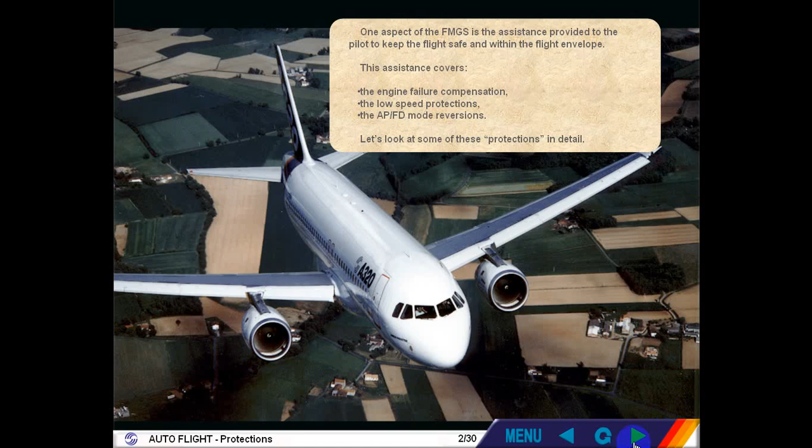In case of an engine failure with autopilot on, the FMGC ensures an automatic yaw compensation in all modes. This is achieved by the FAC, using the yaw damper at takeoff and go around, and the automatic rudder trim in all modes.

Furthermore, the autopilot flight director speed reference system pitch mode automatically adjusts the reference target guidance speed in case of an engine failure at takeoff or go around.

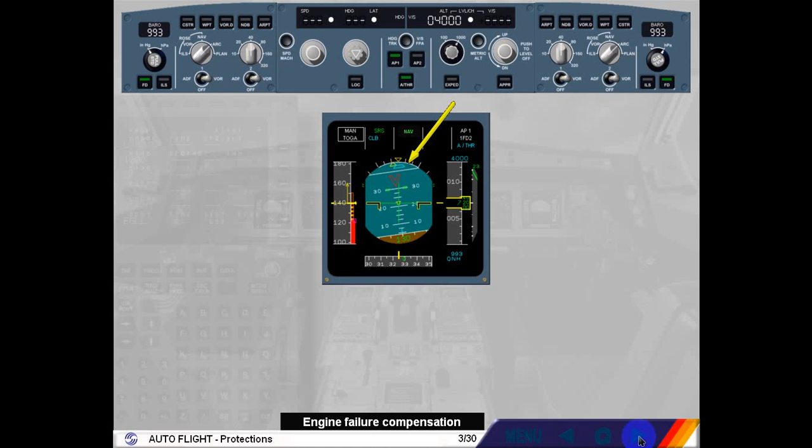Low speed protection is achieved by the following features: the autothrust speed mode, the low energy warning, the alpha floor protection, and the wind shear protection.

When the autothrust is on and in speed mode, if the speed target is selected by the pilot on the FCU and the speed target is below VLS, the autothrust will not allow the speed to decrease below VLS.

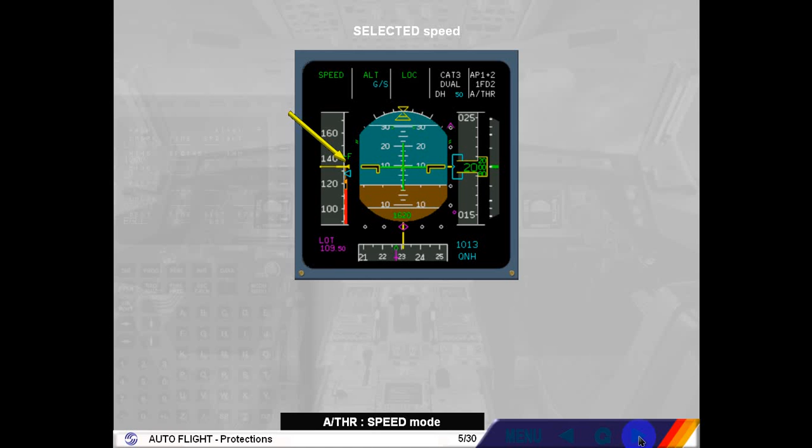If, for any reason such as turbulence, shear, or autothrust off, the aircraft speed drops significantly below VLS, a repetitive speed, speed, speed aural warning is automatically triggered by the FAC.

It drives pilots' eyes to the speed scale, so as to readjust thrust, for example. This warning takes into account the aircraft deceleration rate and current flight path angle, which explains the low energy wording.

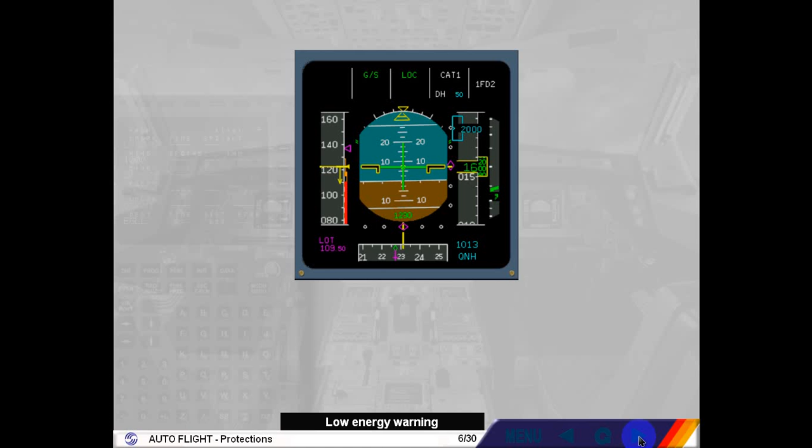It is available when the aircraft is on departure and arrival between 100 feet and 2000 feet radio altimeter and in configuration 2, 3 or full.

If the aircraft speed continues to drop below the low energy warning and the angle of attack increases above a given threshold, the alpha floor function of the autothrust is triggered.

The autothrust commands full thrust, i.e. toga thrust.

The angle of attack threshold, which triggers the alpha floor protection, is processed by the FAC as a function of aircraft parameters such as configuration, weight.

When alpha floor is triggered, autothrust is turned on if it was previously off, indicated by a white autothrust on the FMA. Alpha floor in green is displayed as the autothrust mode.

The alpha floor function is available from liftoff down to 100 feet radio altimeter.

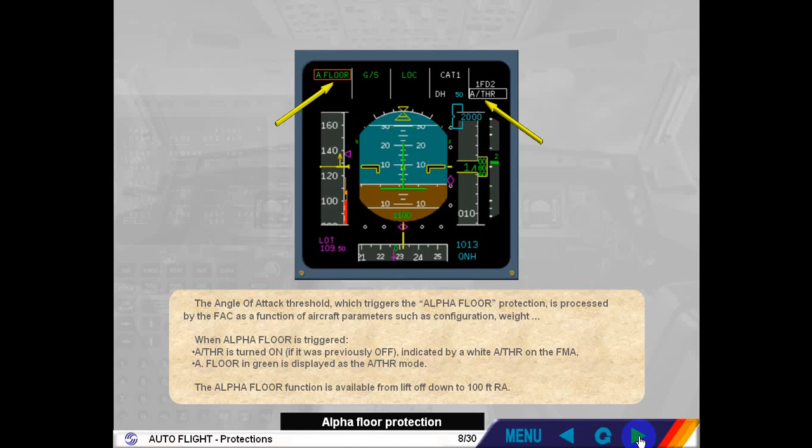Note: the alpha floor protection is lost in cases of combinations of failures such as SFCC1 and FAC2, or both FMGCs. The alpha floor protection is also lost in case of engine out when slats flaps are extended above configuration 1.

When exiting the alpha floor conditions, the autothrust mode reverts to toga lock mode, which indicates that toga thrust is locked regardless of thrust lever position.

To regain thrust control, you have to switch off the auto thrust. You now have manual control of the thrust. You may re-engage the auto thrust when convenient.

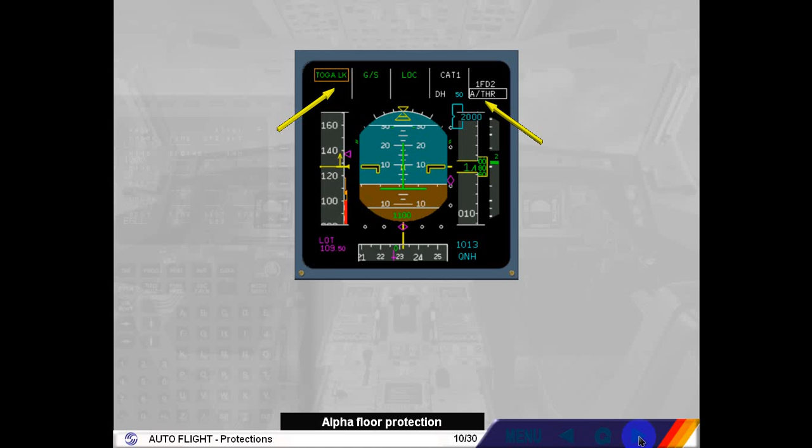Wind shear, wind shear, wind shear. If the aircraft encounters wind shear conditions detected by the FAC, a red wind shear message is triggered on both PFDs, associated with an aural wind shear, wind shear, wind shear warning.

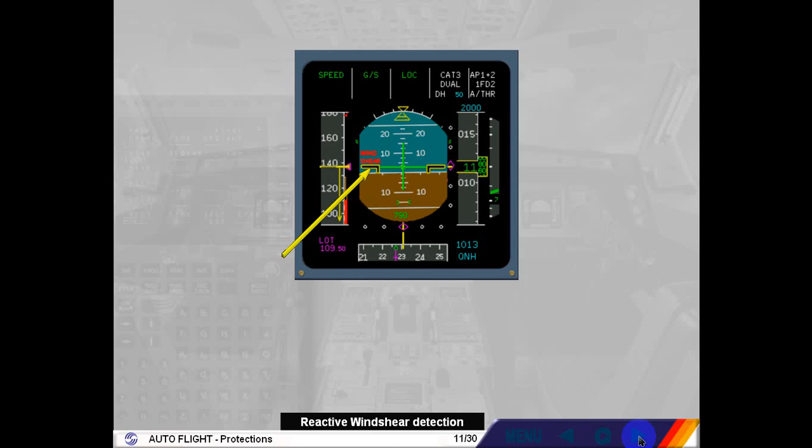This reactive wind shear warning is available from liftoff to 1300 feet at takeoff and from 1300 feet down to 50 feet during landing, with at least Conf 1 selected.

The FMGC provides the following protections against wind shear. At takeoff and go-around, with the autopilot flight director speed reference system vertical mode, which commands a pitch, ensuring a minimum positive rate of climb despite a potential speed drop.

In approach, with the ground speed mini function, the managed speed target in approach is automatically adjusted with wind variations so as to ensure that the aircraft ground speed does not drop below a minimum value.

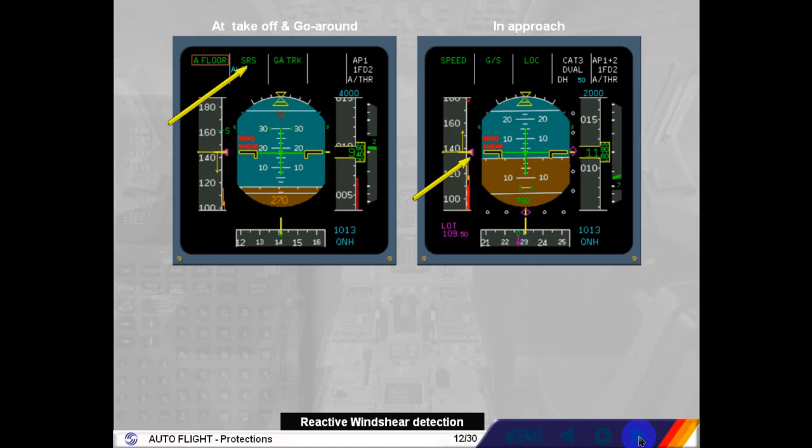Note: if the angle of attack gets too high and reaches the fly-by-wire angle of attack protection, the autopilot disengages. The fly-by-wire maximum angle of attack protection assists the pilot to best react.

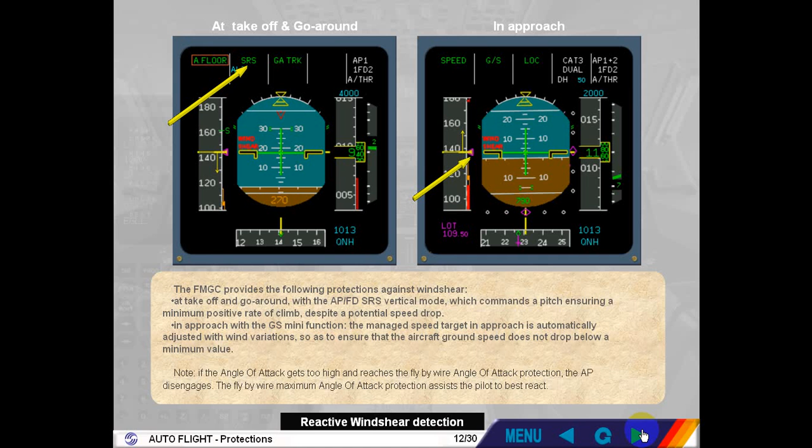Let's now review the mode reversions of autopilot flight director and auto thrust. The mode reversions are automatic mode changes which allow a comprehensive autoflight system behavior when the pilot modifies a target on the FCU, happen in case of loss of navigation mode, and ensure a flight envelope limit speed protection.

Let's review the reversion due to FCU altitude changes. Autopilot is on.

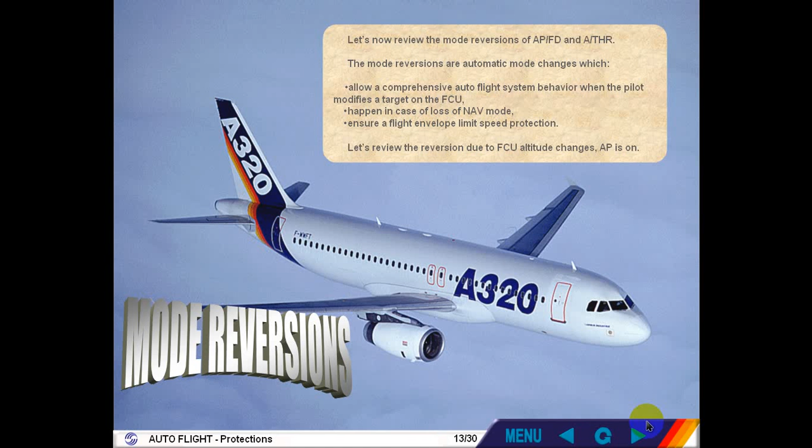Suppose we are in climb, using either open climb or climb to flight level 250 as cleared by ATC. While crossing flight level 225, ATC requires us to level off at flight level 220.

We therefore select the FCU target altitude to flight level 220. The autopilot flight director vertical mode reverts to vertical speed on the current vertical speed value. Notice also that altitude blue is not armed.

It is then up to the pilot to decide how to regain flight level 220, by dialing the desired vertical speed target, down to -1000 feet, or by pulling the altitude selector to engage open descent. Note: you can imagine the same scenario in descent.

Let us see another case. We are now capturing the target altitude, altitude star green. The ATC clears us back up to flight level 250. We therefore select the FCU altitude target to flight level 250. The autopilot flight director vertical mode reverts once again to vertical speed with the current vertical speed value.

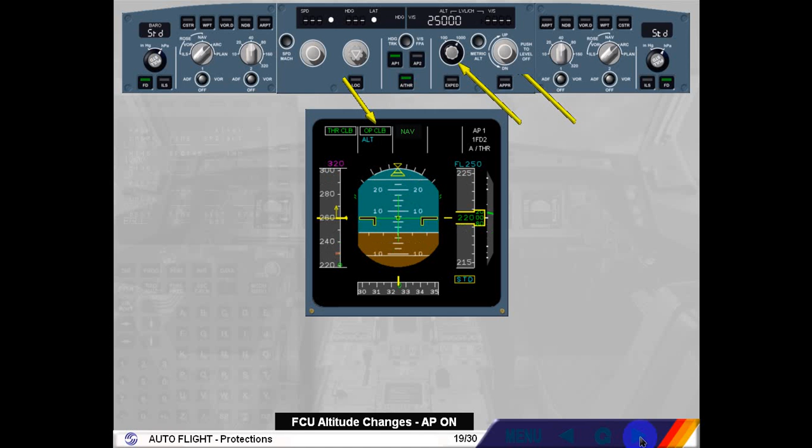It is now up to the pilot to decide how to regain altitude target, by pulling the altitude selector to engage open climb, or by dialing the desired vertical speed target, up to +1500 feet.

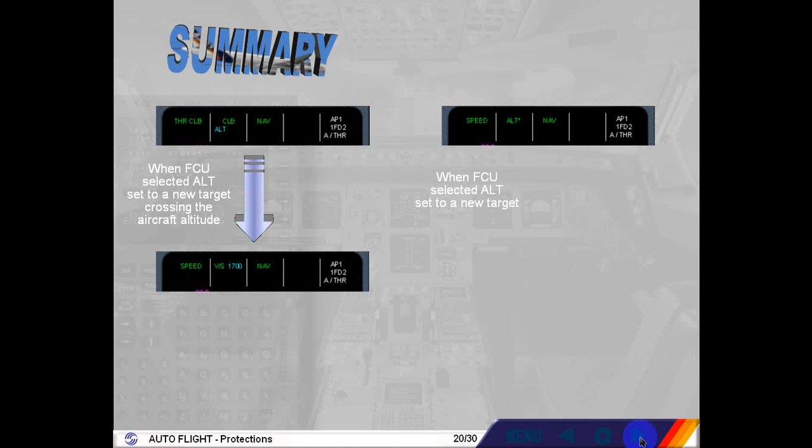These are the essential mode reversions linked to FCU target changes which you may have to make in case of ATC late clearances. They ensure no discontinuity in aircraft behavior and leave you full authority to satisfy these clearances.

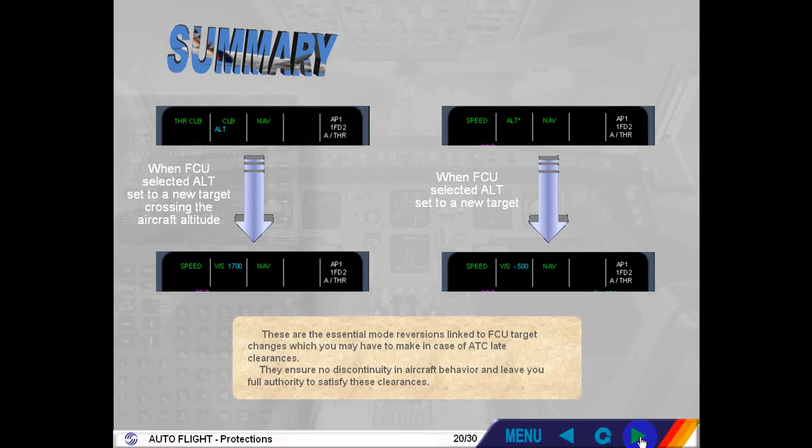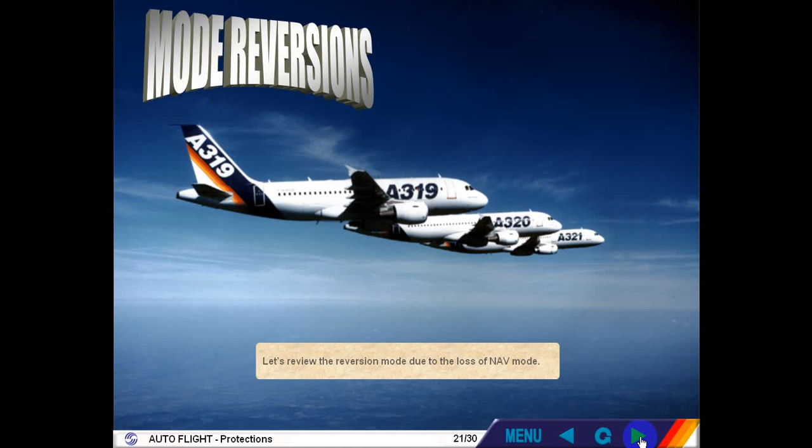Let's review the reversion mode due to the loss of navigation mode. Suppose we are in climb using climb to flight level 150 as cleared by ATC. While reaching flight level 90, ATC requires us to turn to heading 340.

We therefore select the FCU target heading to 340. The autopilot flight director vertical mode reverts from climb to open climb as the lateral mode navigation is replaced by heading. The aircraft pitch behavior is unchanged.

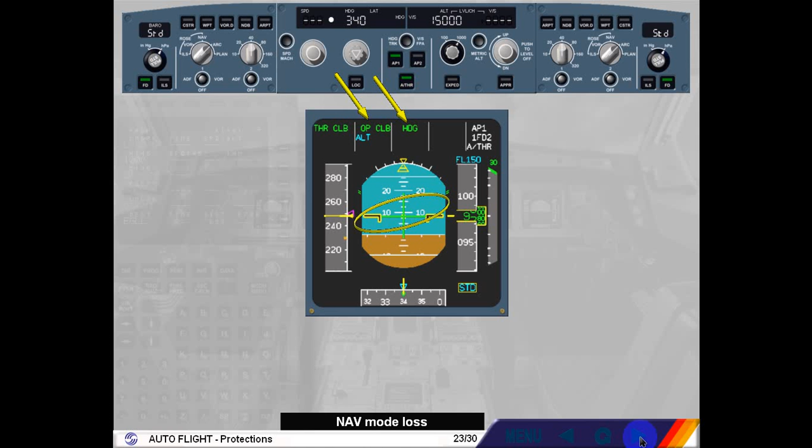Note, if an altitude constraint was targeted with climb mode, it reverts to the FCU selected altitude when open climb mode engages.

We have seen the loss of navigation mode in climb. On the right side of the screen, you can review a similar scenario in descent.

When heading mode is engaged, which causes the loss of navigation mode, descent mode reverts to vertical speed mode, with the current vertical speed value, and speed mode engages on autothrust. The aircraft pitch behavior is unchanged.

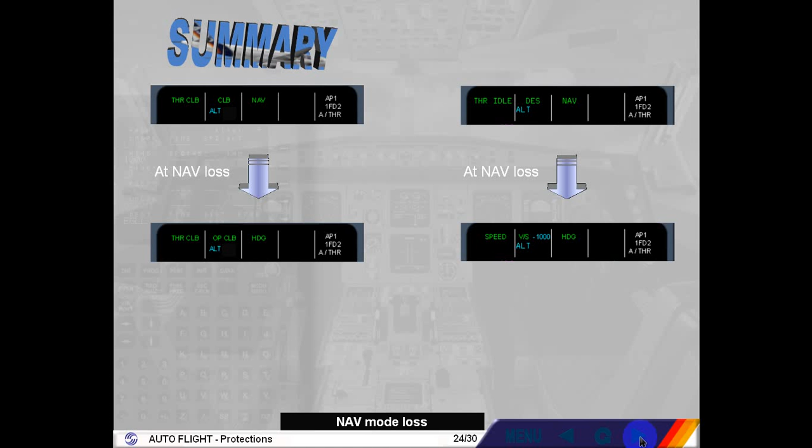Note, the loss of navigation mode may be caused by a flight plan discontinuity.

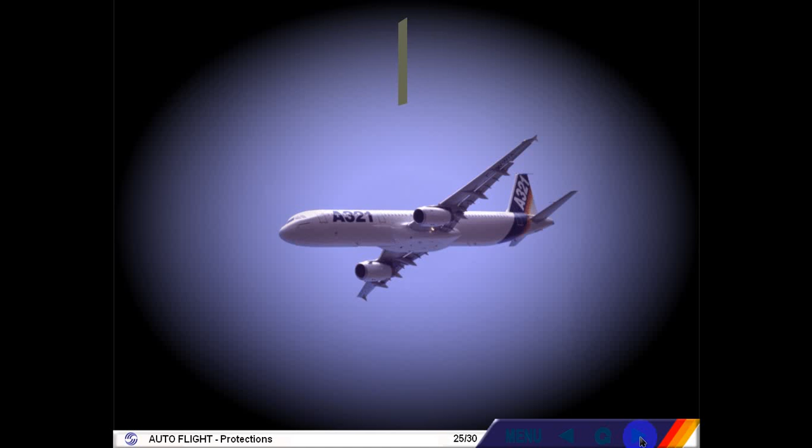We will now study the mode reversion when the flight director orders are not followed. Manual flight.

Suppose the aircraft is manually flown with flight director on, autopilot off. The current vertical mode is open descent and the autothrust mode is thrust idle. In order to demonstrate the next reversion, the aircraft is pitched up, disregarding the flight director orders given by the flight director bars. The speed decreases.

When the aircraft reaches VLS minus 2 knots or VLS minus 17 knots with speed brakes extended, the autothrust reverts from thrust idle to speed, and thrust is readjusted to recapture the target speed.

Let us see another case. This time we are in climb with thrust climb, open climb modes engaged. For any reason, we do not hand fly the flight director pitch bar, and we pitch the aircraft down. The speed increases.

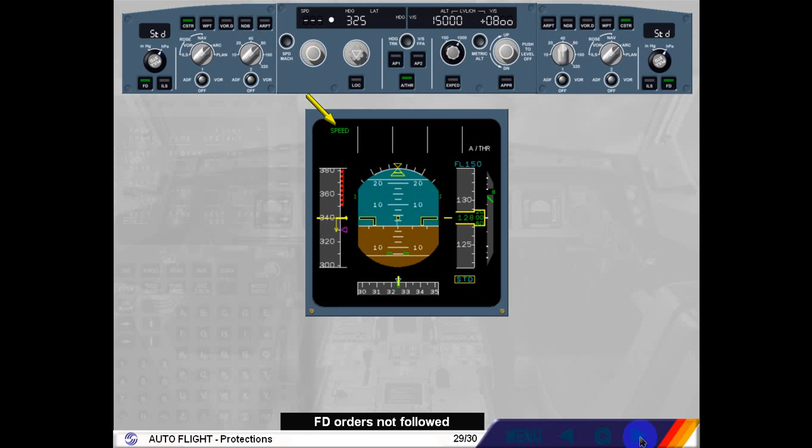When the aircraft reaches Vmax plus 4 knots, the autothrust reverts to speed mode. Thus, the thrust decreases to recover the target speed. Note, depending on the aircraft configuration, Vmax can be VMO, VLE, or VFE.

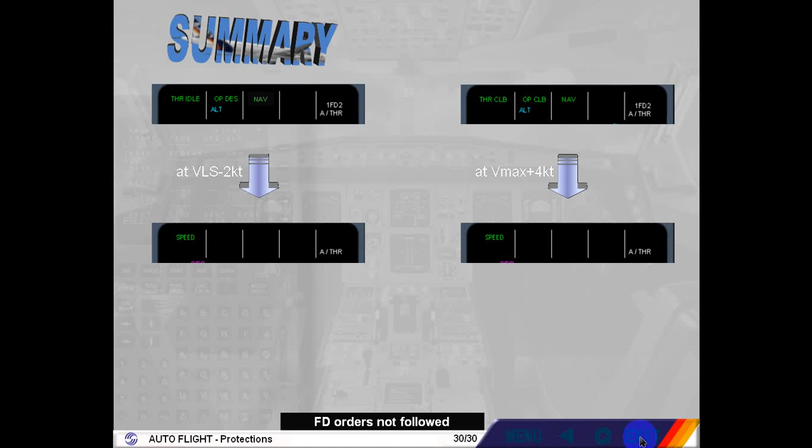The flight envelope limit speed protection is ensured by autopilot or autothrust, with flight director on, autopilot off, mode reversion, so that at minimum speed or at maximum speed, the flight director bars are removed. Therefore, the autothrust reverts to speed autothrust mode in order to regain target speed.

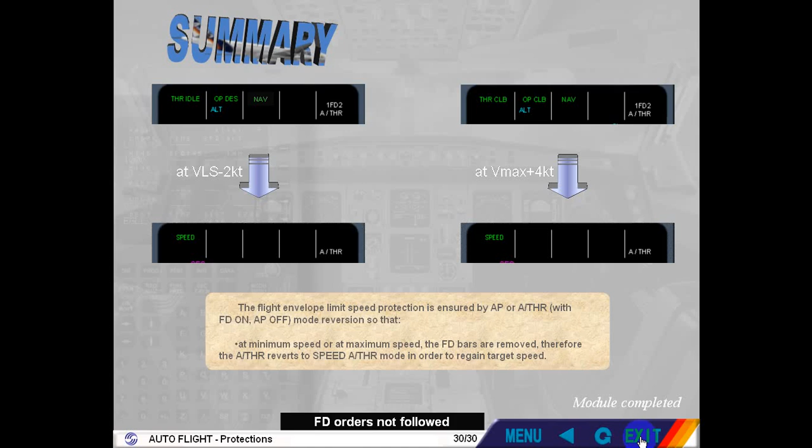Both FMGCs exchange data through a cross-talk bus and are synchronized. When both FMGCs crosstalk, they are in dual mode of operation. The FMGC which drives the synchronization is called master.

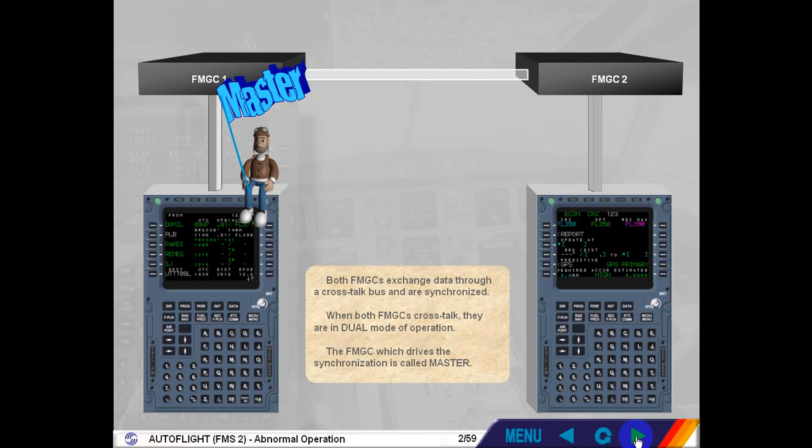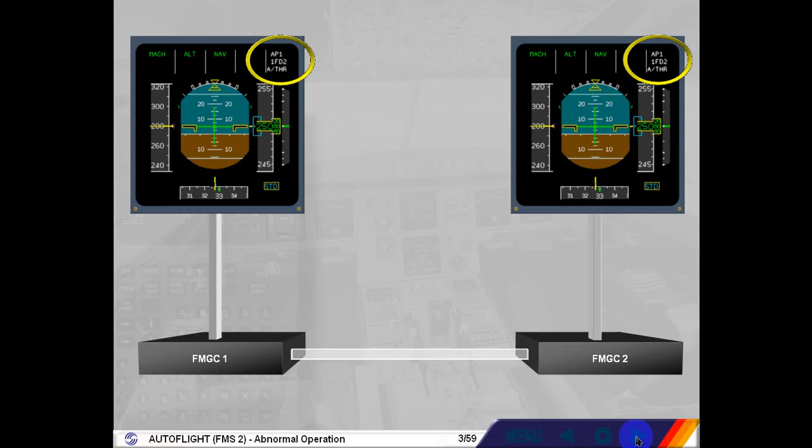The master FMGC is automatically determined by the engagement status of the autopilot flight director. If autopilot 1 is on, FMGC 1 is master. If autopilot 2 is on, FMGC 2 is master. If autopilot 1 plus 2 and/or flight director 1 plus 2 are on, FMGC 1 is master. Here, FMGC 1 is the master as autopilot 1 is on.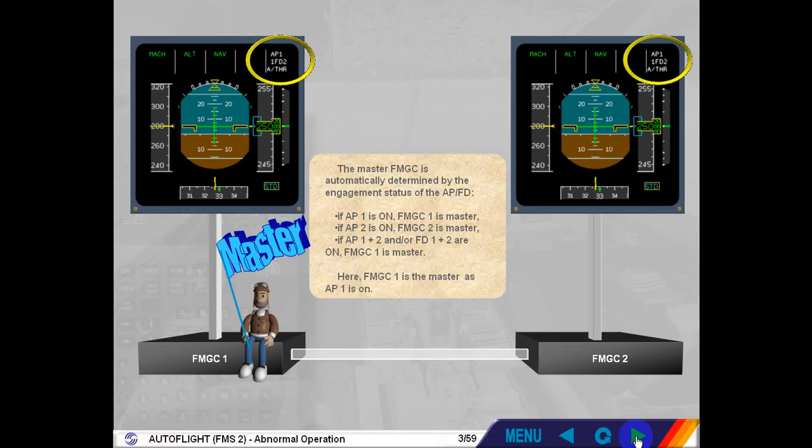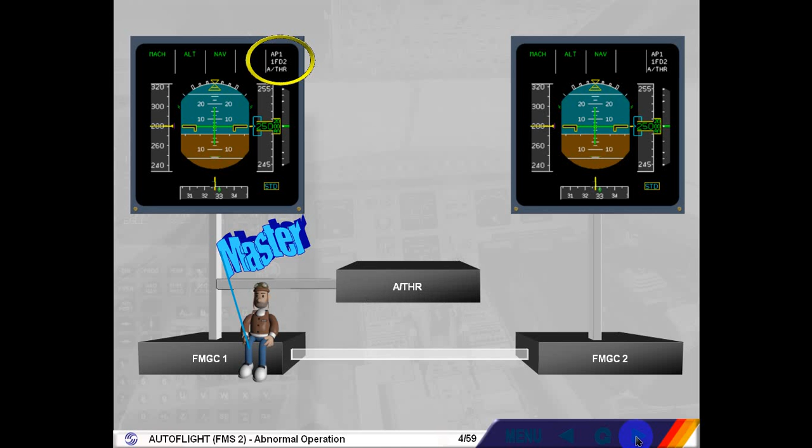Autothrust is driven by the master FMGC. Note, when flight director 1 plus 2 are on, each FMGC drives its flight director and FMA on its on-side PFD.

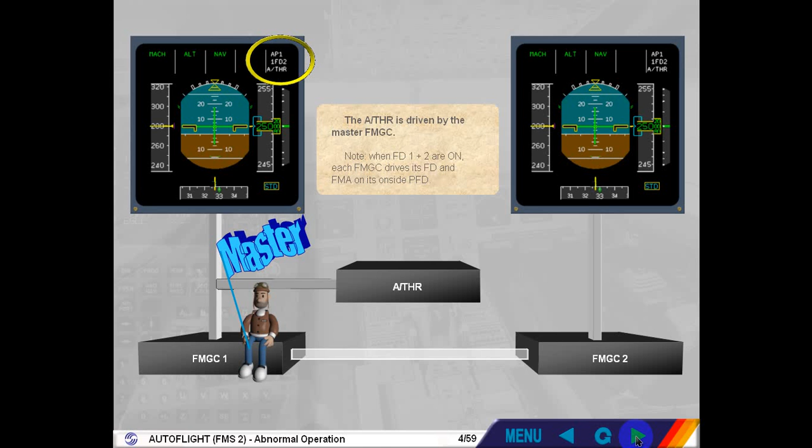If the crosstalk is lost between both FMGCs, each FMGC operates independently. This mode of operation is called independent mode. The crew is advised by a message on the scratch pad, independent operation.

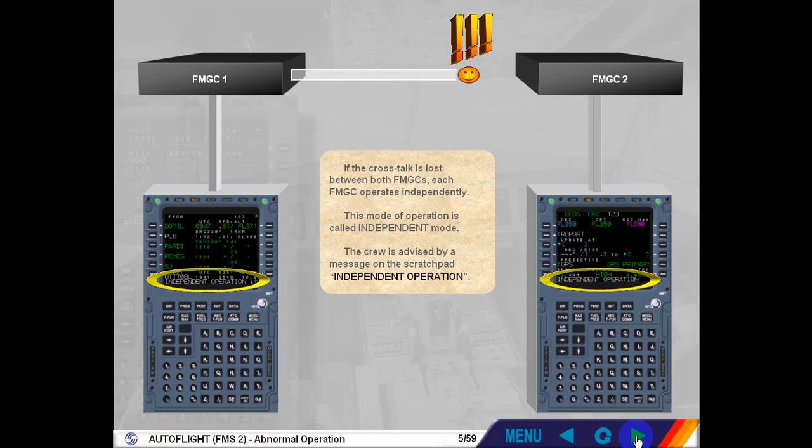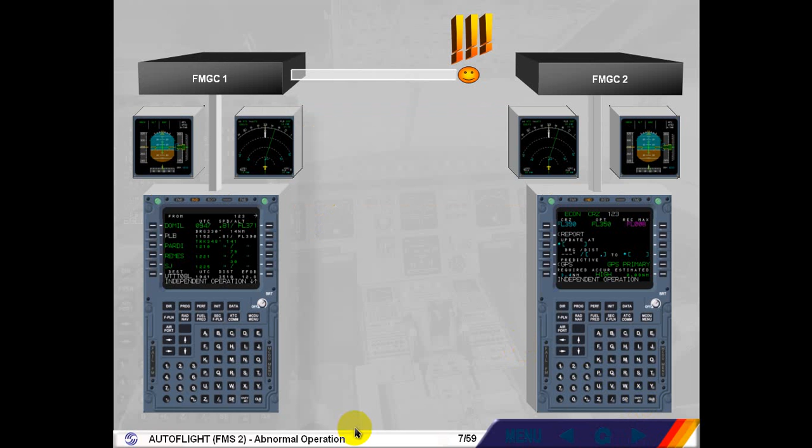Notice the amber IND light on each MCDU, which indicates that the on-side FM has detected an independent mode of operation. FMGC drives its own FG, autopilot flight director, its own EFIS, PFD, ND, and its own MCDU.

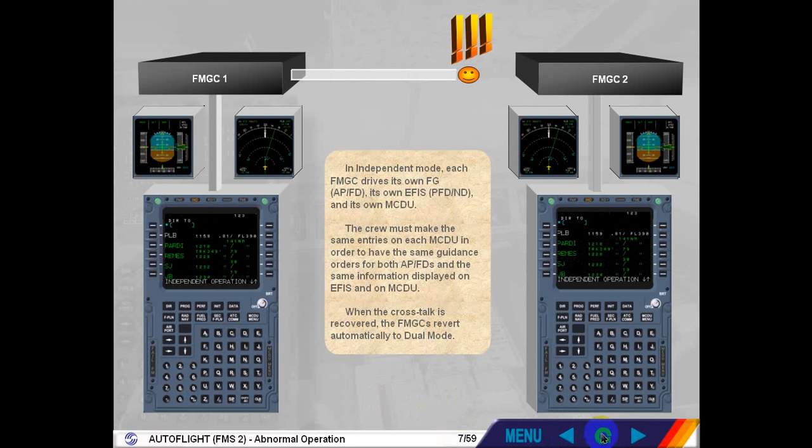Let us review the failure of one FMGC, FMGC 1 for example. Let's assume we are in flight and no previous faults have occurred.

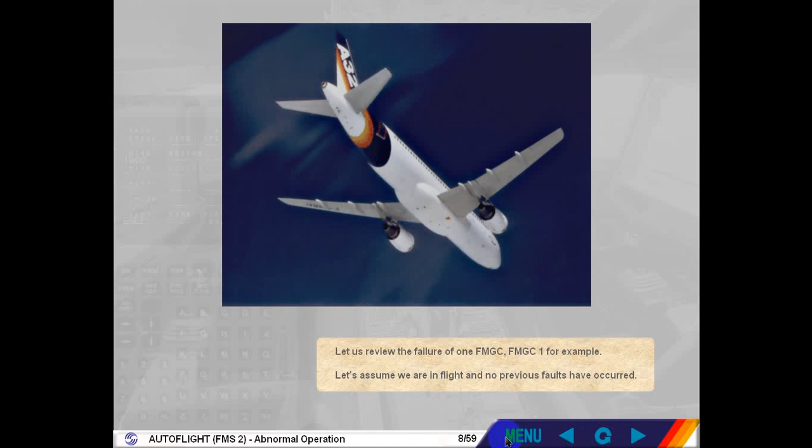If autopilot 1 and autothrust were engaged, autoflight, autopilot off, and autothrust off are triggered on ECAM. Autopilot 1 and autothrust go off.

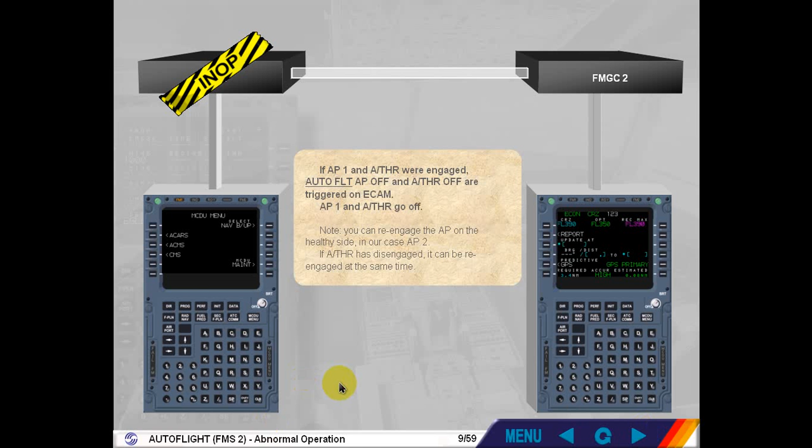Note, you can re-engage the autopilot on the healthy side, in our case autopilot 2. If autothrust has disengaged, it can be re-engaged at the same time.

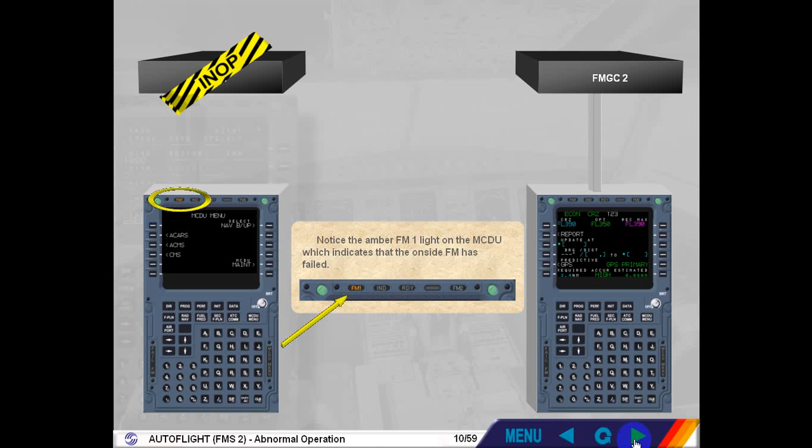Notice the amber FM1 light on the MCDU, which indicates that the on-side FM has failed. MCDU1 is now a copy of the other MCDU with the scratchpad message OPP FMGC in process. This mode of operation is called single mode.

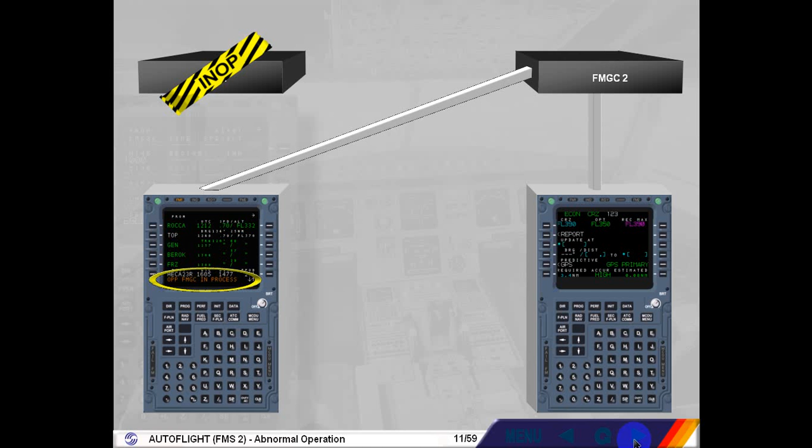Both FMAs display 2FD2, indicating that Flight Director bars on both PFDs are driven by FMGC 2. Additionally, only FMGC 2 position is computed and FMGC 2 tunes the offside nav aids.

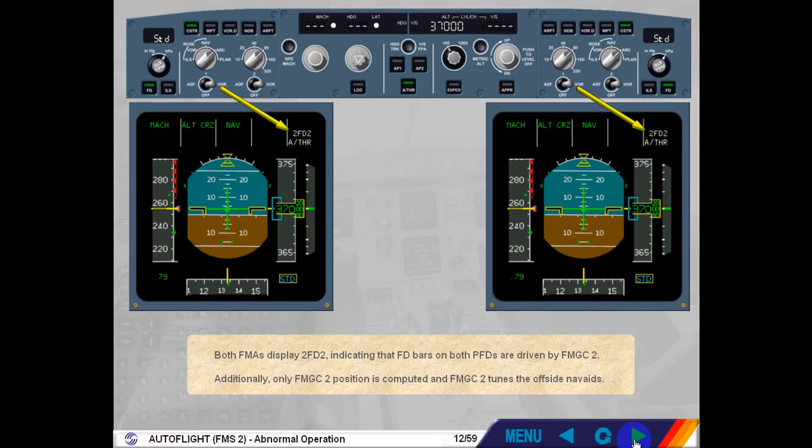As a consequence of single mode, ND1 displays set offside RNG mode and map not avail messages as long as ND1 range and mode are not set identically to those of ND2.

Here the captain's ND has to be set to the same range as the first officer's ND in order to be able to display navigation map. Set captain's ND range to 80.

As a consequence of single mode, ND1 displays set offside RNG mode and map not avail messages as long as ND1 range and mode are not set identically to those of ND2.

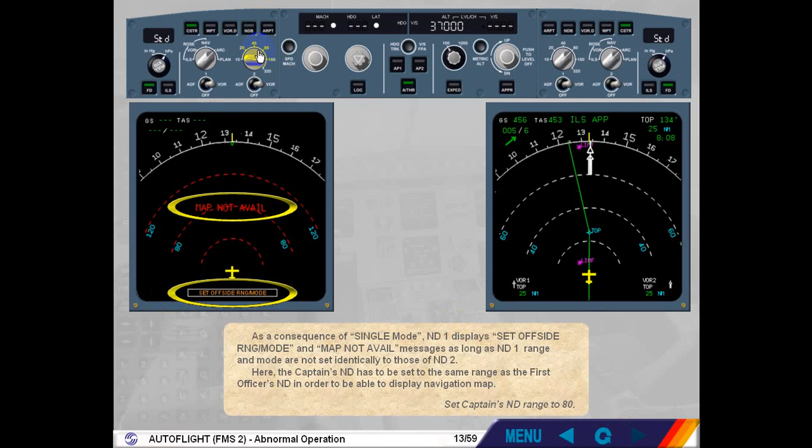Here the captain's ND has to be set to the same range as the first officer's ND in order to be able to display navigation map. Set captain's ND range to 80.

Let's review a similar failure called FMGC reset, which is a temporary failure of one FMGC caused by a software interruption.

During the time of the reset, the mode of operation is single mode with slightly different effects.

You are in cruise. Autopilot 1 is on. Flight Director 1 plus 2 are on in managed mode.

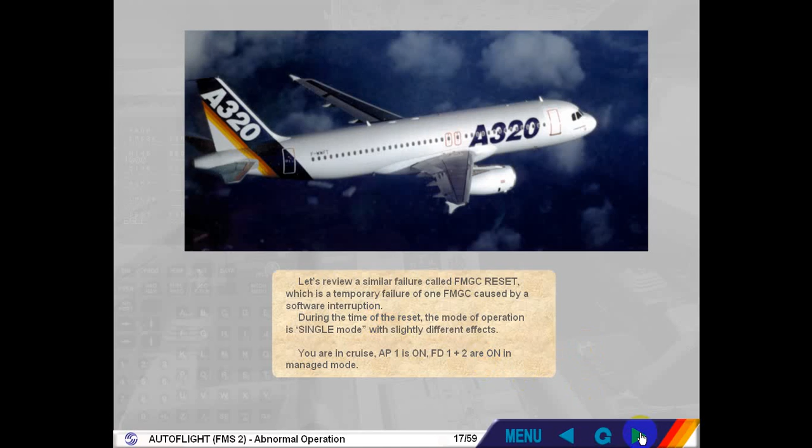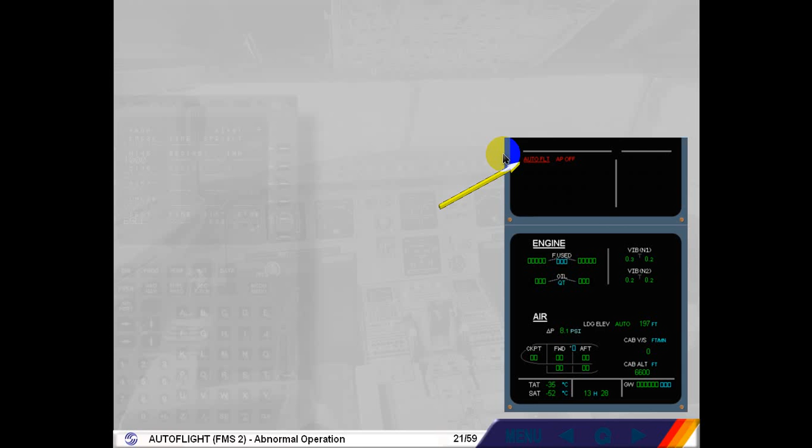Read the title of the failure. The warning, Autoflight, Autopilot Off, is displayed on the engine warning display. The autopilot has tripped off because its on-side FMS has experienced a reset and a managed mode was engaged.

After review and confirmation from the pilot flying, clear autoflight.

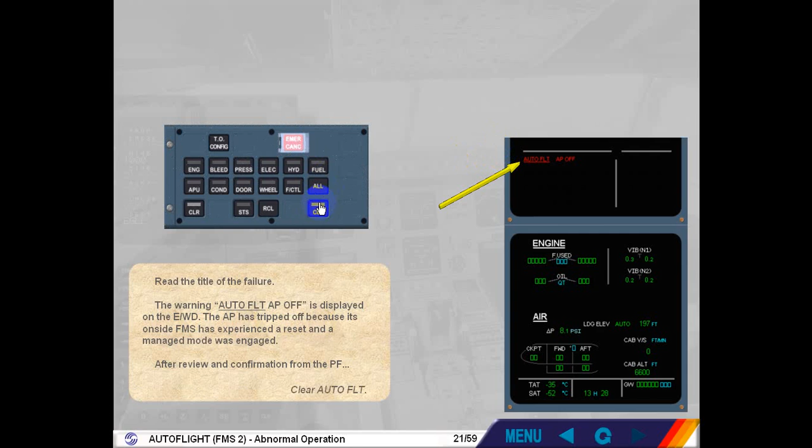Observe that the flight director has reverted to heading vertical speed modes and that Autopilot 1 is no longer displayed on the FMA.

FMGC 1 is in auto reset. During the time of the reset, the FM mode of operation reverts temporarily from dual to single mode of operation.

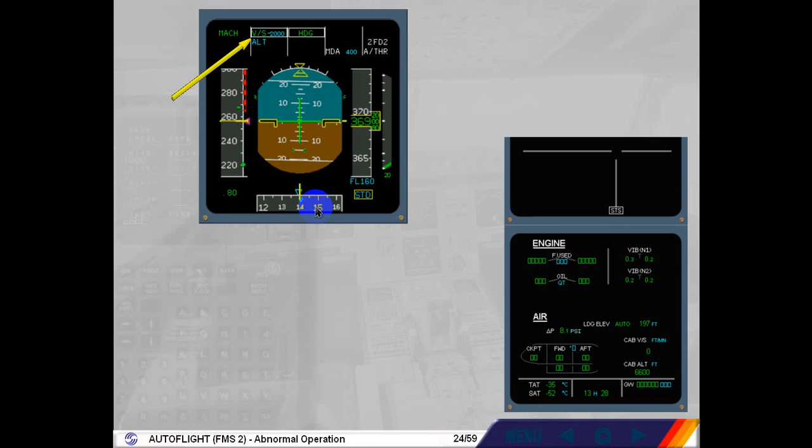Since FMGC 1 is in auto reset, Autopilot 2, Flight Director 2 and Autothrust are fully available.

Note, depending on the autopilot modes initially engaged and on the type of reset, autopilot loss and flight director reversion may or may not occur. In this example, we are facing one of the most serious cases.

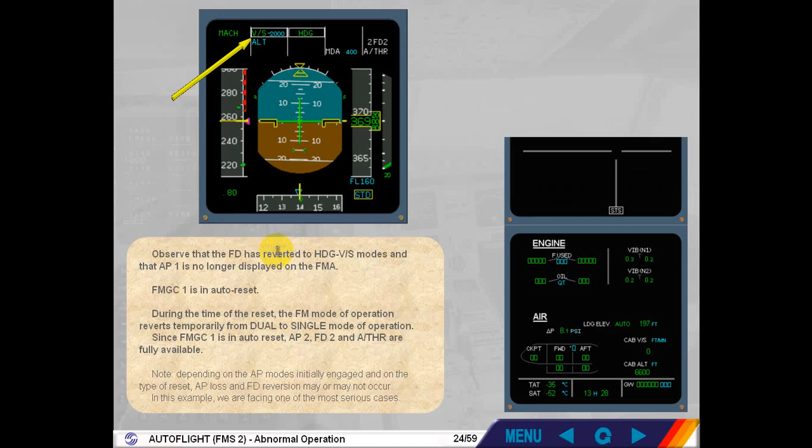During the time of the reset, ND1 displays Map Not Avail red message. Both MCDUs display the aircraft status page with Please Wait on the scratch pad. FM1 light is illuminated on the MCDU. Auto-tuning of nav aids may be lost on side 1.

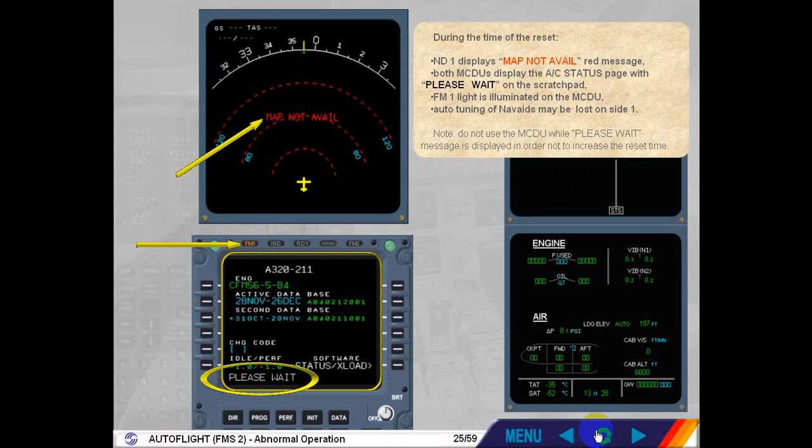Note, do not use the MCDU while Please Wait message is displayed, in order not to increase the reset time. The reset is usually over after a few seconds. All functions are recovered. This is indicated by the disappearance of the Please Wait and Map Not Avail messages, as well as by the extinguishing of the FM1 light.

Check your flight plan and the tuned nav aids. Re-engage the Autopilot 1 and Managed Modes. Reselect the most convenient MCDU page.

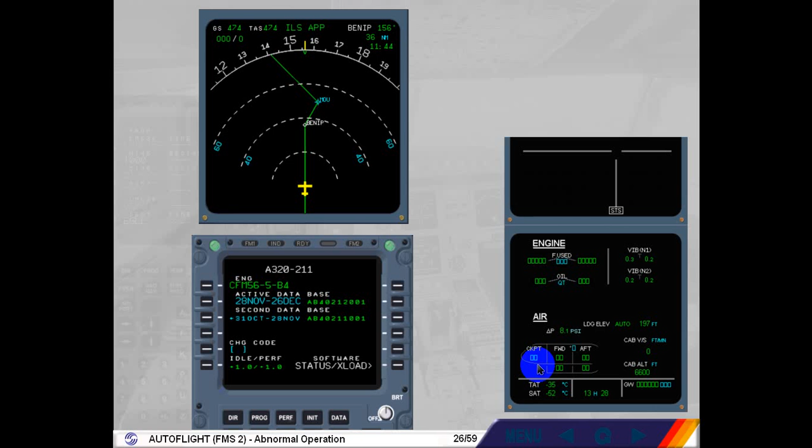We have studied an FMGC1 reset. We will now review an FCU fault. Suppose the aircraft is in descent.

On the engine warning display, read the title of the failure. Note that FCU1 failure has no consequence on the FCU indications, since FCU2 has automatically taken over.

The pilot flying will ask you to perform the ECAM actions. Here, only the barometer reference has to be cross-checked between the PFDs, the EFIS control panels and the standby altimeter. Indeed, FCU2 drives both PFD1 and PFD2, including the baro reference.

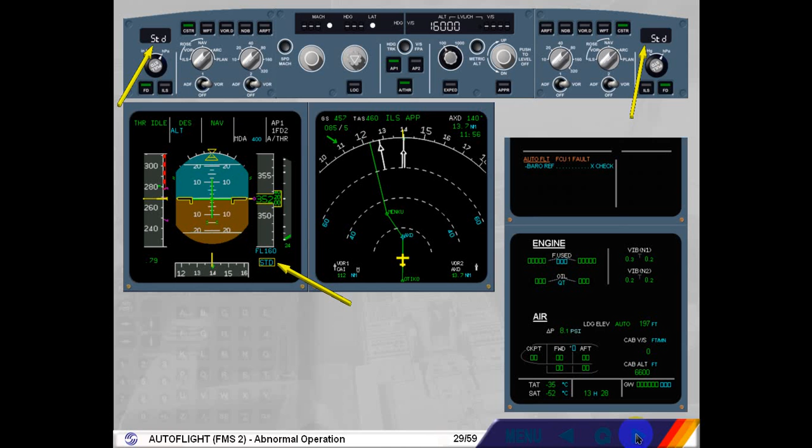After review and confirmation from the pilot flying, clear autoflight. The status page is displayed for review. No system capability degradation is shown. You can see in the inoperative system column that FCU1 is now inoperative. Clear status.

ECAM action completed. We will now review the unlikely double FCU failure. Autopilot 1 and autothrust are on. You are the pilot non-flying.

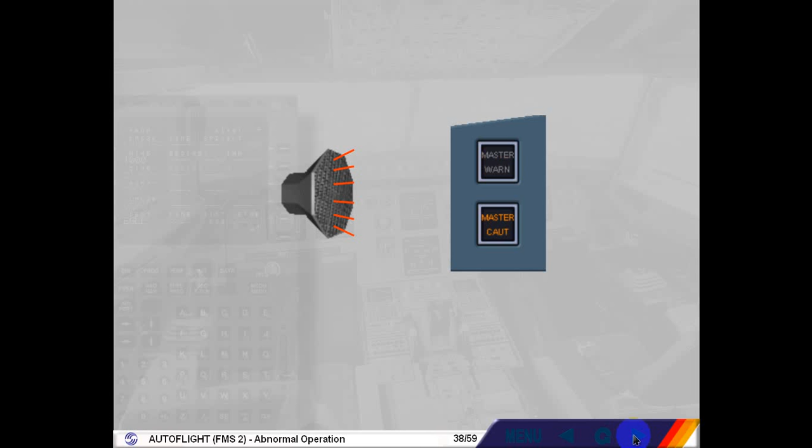On the ECAM engine warning display, read the title of the failure. The consequences of the FCU1+2 failure are: both autopilots are lost, autothrust is lost and thrust is locked, thrust lock message on FMA. All FCU controls and indications are lost, including the EFIS control panel.

On the engine warning display, an additional amber caution comes up. Engine thrust locked is triggered every 5 seconds. The procedure asks to move the thrust levers out of the climb detent so as to recover manual control of the thrust. We will do it for you in order to cancel this ECAM caution.

The thrust is now manually adjusted by the pilot flying. Note on the PFD that all targets, speed, heading, altitude are lost and red flags are displayed.

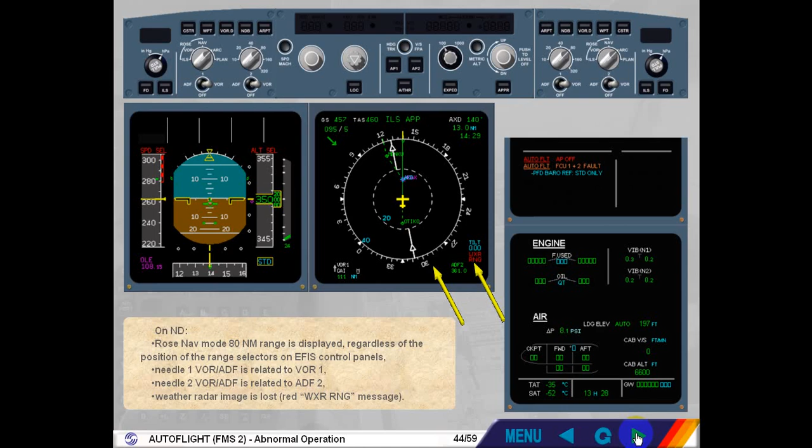The pilot flying will ask you to perform the ECAM actions. You will have to deal with the first failure, autopilot off. Clear autoflight.

Then you deal with the second failure, autoflight FCU1+2 fault. Check the PFD baro reference, automatically set to standard, with the standby altimeter. Once below the transition level, set the standby altimeter reference to the actual QNH.

Once the procedure is achieved and confirmed by the pilot flying, clear autoflight. The status page is displayed for review.

As the baro reference is 1013 hectopascals, you have to determine the altitude correction to be applied to get the proper altitude reading, as a function of QNH minus 1013. The approach capability is degraded to Cat 1.

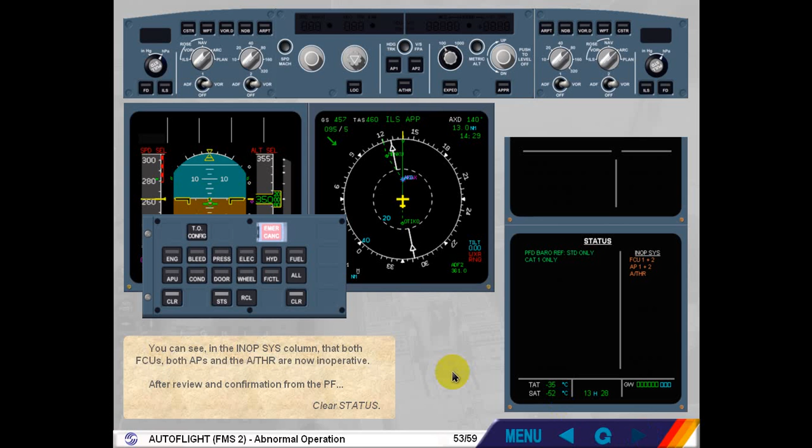You can see in the Inoperative Systems column that both FCUs, both autopilots, and the autothrust are now inoperative. After review and confirmation from the pilot flying, clear status. Completed.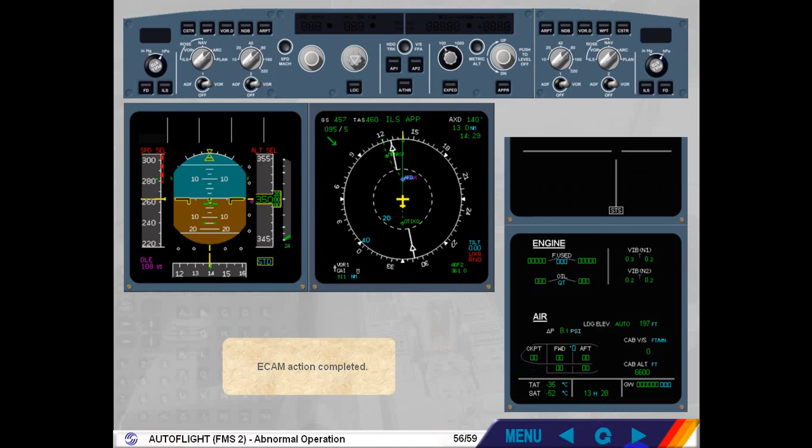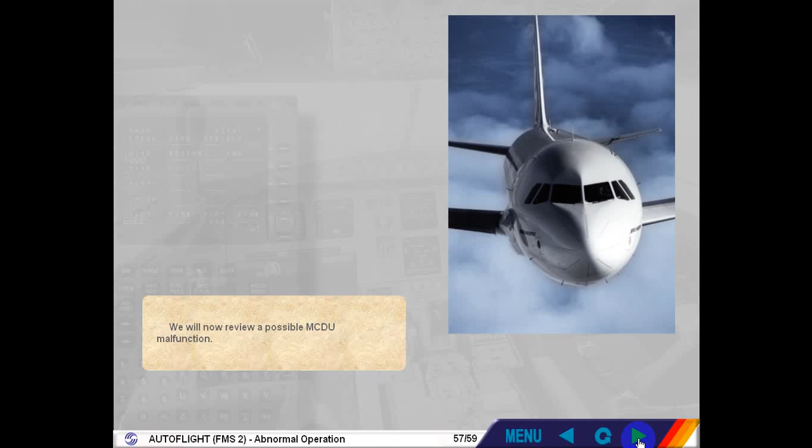We will now review a possible MCDU malfunction. In case you cannot insert any data into the scratch pad, nor change any MCDU page, the MCDU is locked. Such a failure is not automatically detected. To recover the faulty MCDU, simply turn it off and after 5 seconds, back to on.

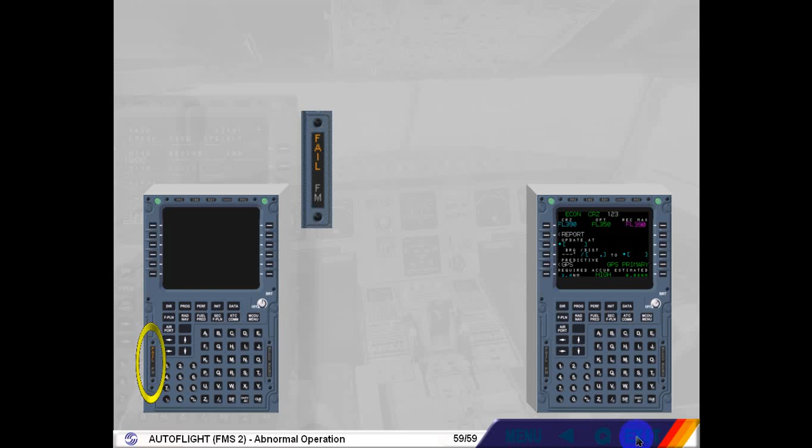The same procedure would apply in case of an MCDU failure indicated by the amber annunciator fail on the MCDU itself. You can try to recover the faulty MCDU, turn it off and after 5 seconds back to on. If it gives no result, turn it off again.